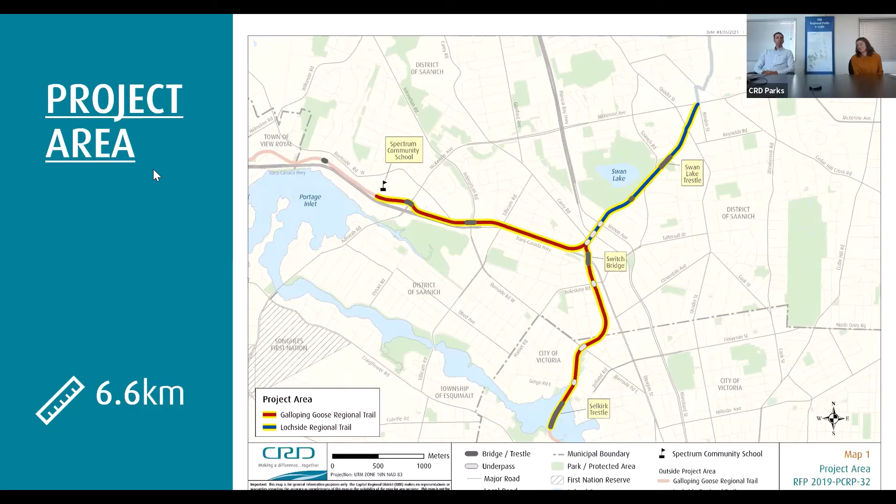So as Emma mentioned, I'm going to spend a few minutes here giving an overview of the study and some of its key findings. The study really was about identifying opportunities for improvement and enhancement to these 6.6 kilometers of existing regional trail. Some of the key opportunities that were considered include opportunities to provide more space to accommodate more people walking, rolling, and cycling, opportunities to improve safety at trail junctions and road crossings, opportunities to create comfortable conditions for travel at different speeds along the trails, and opportunities to improve safety, personal security, and comfort on trails.

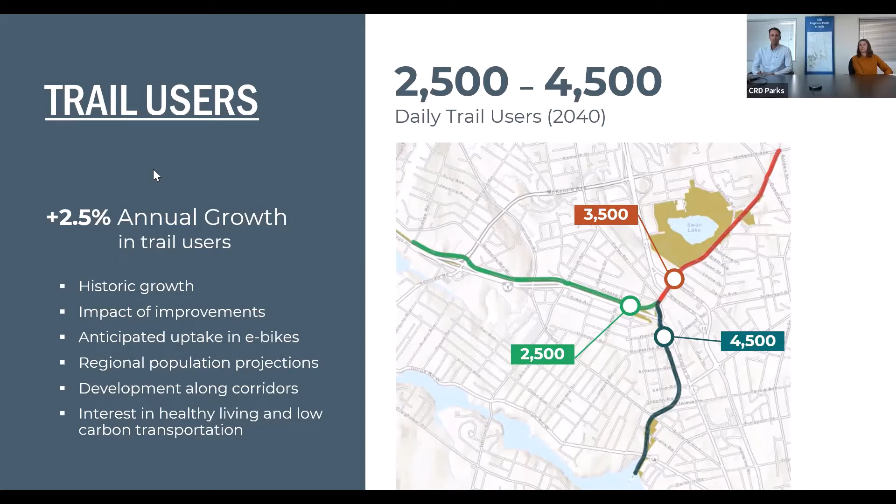Another piece of technical work undertaken was to understand the characteristics and the dimensions of key trail user groups. The diagram on the left is showing typical pedestrian dimensions. Of critical importance is this dimension for user groups that might be pushing a stroller, that might be using a wheelchair, or might be using other mobility aids. The dimensions for those trail users are absolutely fundamental to understanding what sort of dimensions and widths might be necessary.

Right-hand side of the screen, similar information, but specific to cyclists. So a person on a bicycle takes up a width of approximately 3/4 of a meter, that being handlebar to handlebar. But then we also want to build in and give consideration for additional width, where a cyclist might not travel in a completely straight line, and where additional width might be necessary in order to provide for safe and comfortable side-by-side or passing conditions.

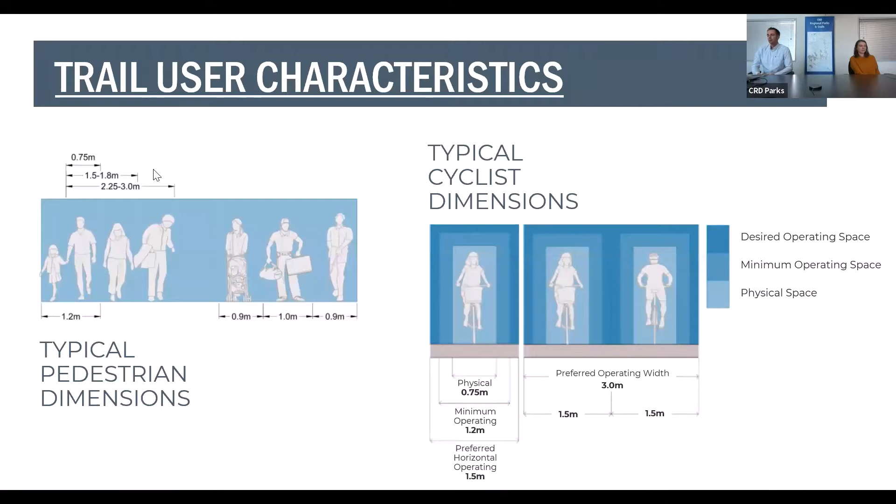Also important was consideration of trail user speeds. We know full well that someone walking typically travels much more slowly than someone on a bicycle. The diagram on the screen indicates a typical average walking speed of approximately 5 kilometers per hour, where a person on a bike might travel at 20 kilometers an hour or greater when you start factoring in e-bicycle use.

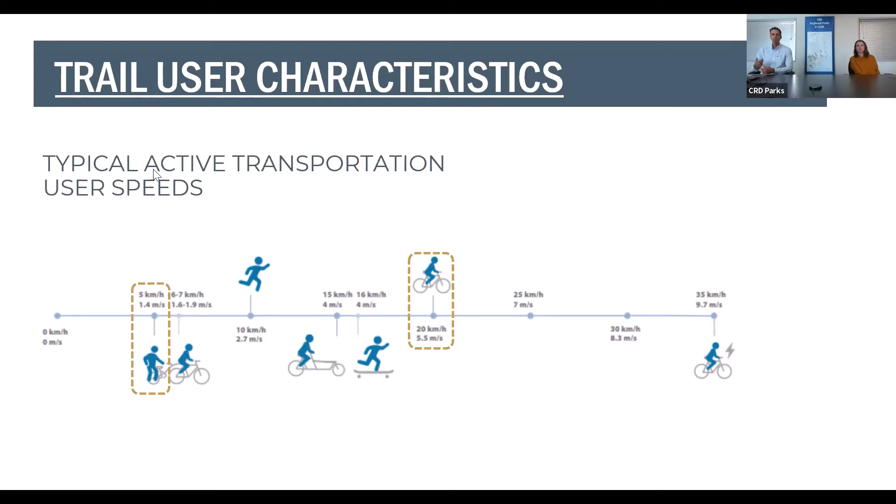So not only is it the number of people using the trails and the dimensions of those people using the trails, it's also about the differential between different people using the trails in terms of how fast they travel and how comfortable and safe it might be for them to be sharing those trail facilities.

An extensive inventory was also developed to understand the trail and its current condition. The diagram on the right-hand side of the screen shows current existing trail widths. Sections shown in red and in orange are the narrowest segments of trail, at between 3 to 4 meters. We see the majority of the section of the Lochside Regional Trail considered in this study is less than 4 meters in width. We also have a large number of the sections of the Galloping Goose to the south at 3 to 3.5 or 3.5 to 4 meters.

The portion of the Galloping Goose to the west, that being west of Uptown and west to beyond McKenzie interchange, we do see some wider trail widths at 4 or 5 meters, much of that due to more recent improvements associated with the interchange project.

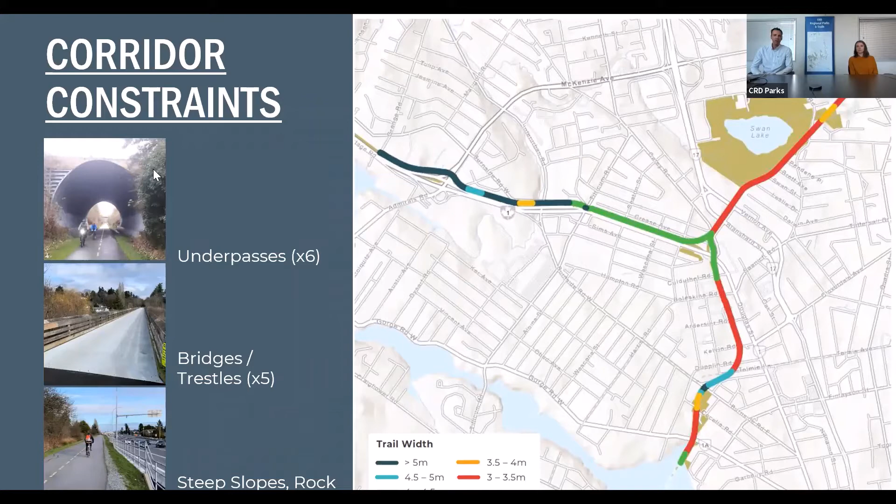A number of site-specific constraints also need to be considered in giving consideration to further widening. There are 6 underpasses throughout the project study area, 5 bridges and trestle crossings, as well as a whole host of areas of steep slope, rock cuts or retaining walls where widening is made much more difficult due to these site-specific constraints.

So with that technical background in place, as well as research of best practices in other communities and industry guidelines, 3 different trail reconfiguration options were identified and used as the basis for furthering the study. The first option was a widened multi-use pathway, taking the current trail function where all users share the space and widening it out consistently throughout the corridor.

Option 2 being separated use pathways, so a dedicated cycling pathway directly beside a dedicated pedestrian walkway, distinct spaces just side by side. Option 3 being separated pathways with a center boulevard, physically separating with lateral space the cycling pathway from the pedestrian walkway. That's what's shown conceptually on the right-hand side of the screen.

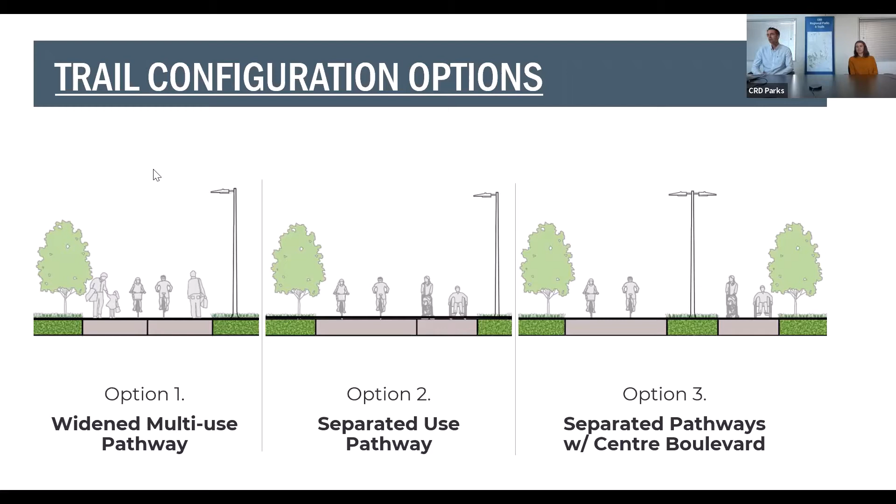Those options were taken through an options evaluation exercise to understand the benefits and disbenefits of each relative to one another. A number of criteria were considered. Factors included capital costs, so the physical cost of each reconfiguration option; the level of improvement for trail user comfort and experience; the level of improvement in trail user safety and addressing trail user conflicts along the corridors; possible environmental impacts; the overall quality of facility; constructability; as well as future and ongoing maintenance and operations impacts for each option.

Having gone through that option evaluation exercise and understood the benefits and disbenefits of each, the study concluded that option 2, the separated pathway option, was the preferred option. This option, shown on the screen to the right, includes separated facilities for people walking and rolling and for people cycling. It includes a dedicated bike path of 4 meters and a dedicated pedestrian walkway of 2.5 meters. Both facilities facilitate side-by-side travel and passing for the users within each facility.

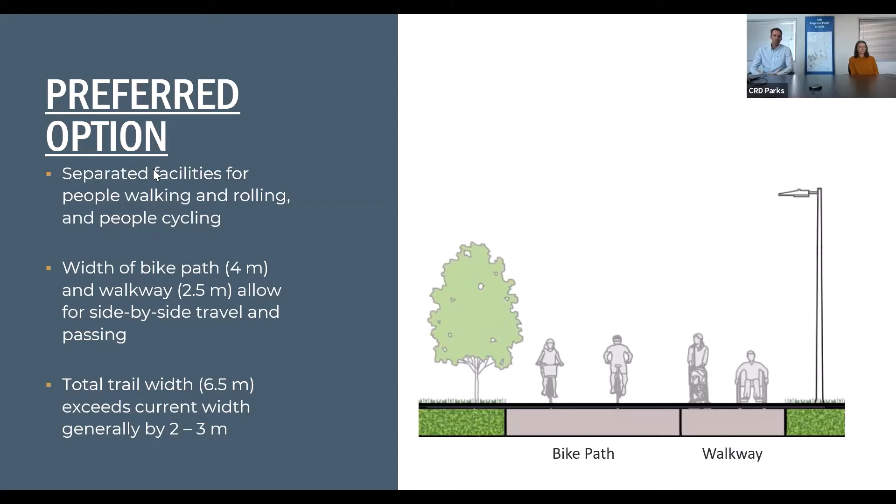This configuration represents a total trail width of 6.5 meters, which exceeds the current widths by generally 2 to 3 meters, although there is some variation currently. So that's a general figure, but over the length of the corridors it represents an increase in overall trail width.

Second priority was the portion of the Galloping Goose immediately to the north through Switch Bridge and up the Lochside Trail as far as Saanich Municipal Hall.

This section also has some constrained locations as well as relatively high user volumes. Third priority, the section of the Lochside Regional Trail to the north, that being the section from Saanich Municipal Hall all the way up to the McKenzie Borden location. Priority 4, section of Galloping Goose to the west, and finally the fifth priority being the section of the Galloping Goose furthest west, so Tillicum Road to beyond McKenzie Avenue. And much of this section has been improved and widened more recently associated with the McKenzie interchange.

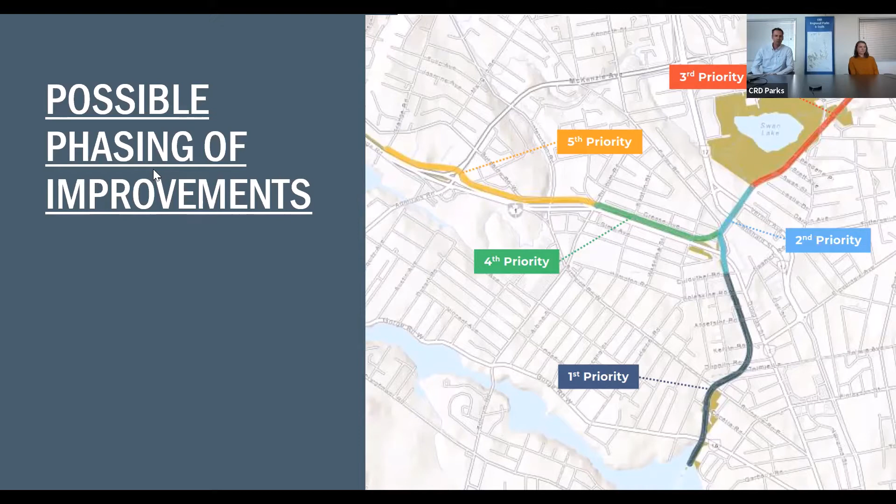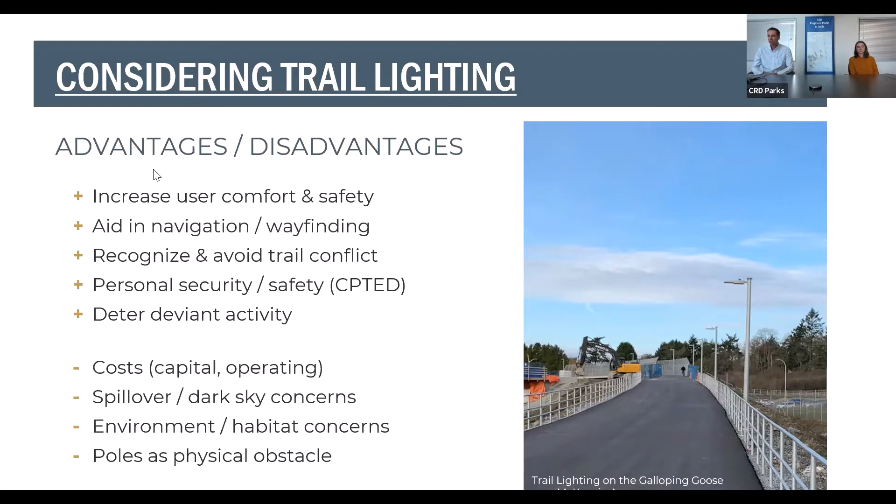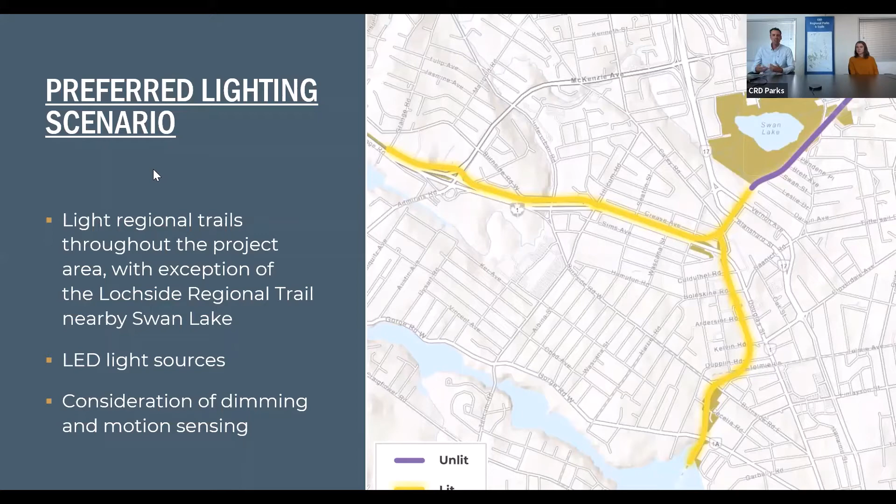So with these advantages and disadvantages in mind, the study does conclude and recommend lighting for the bulk of the trail corridors within the study area. So the diagram on the right showing that, and it's basically the full extent of the project study area, with the exception of the section of the Lochside Regional Trail nearby Swan Lake, shown in purple on the map on the screen. The study recommends light emitting diode LED lighting types. They're both effective, but also energy efficient. And consideration is also given in the study to possible dimming and motion sensing technologies, so that lighting can be effective and efficient, offered at times when it is needed most, as well as so it can be adaptive, so that in different seasons or different times of day, it emits the amount of light that is necessary, but not more.

So those are some of the key takeaways from the study itself, and we'll pass it back to Emma here to talk about project next steps. Thanks, Dan, for that detailed overview of the study and the recommendations. So I'll now outline a few of the anticipated next steps of the project prior to opening up the floor for questions. So as many of you may be aware, there's an online survey available now on the CRD website until midnight, June 13th, for public to provide their feedback on the proposal. So the results from the survey will be reviewed, and the feedback will be reviewed to determine the level of support for the separated use pathway with lighting and for the priority areas.

We expect that a report will be presented to the CRD board in the fall of this year that includes the summary of the public feedback and considers the next step for possibly implementing parts of the project. So if the board does deem that there's support to proceed and authorizes that, funding would need to be secured through successful grant applications, possible partnerships, and an approved budget.